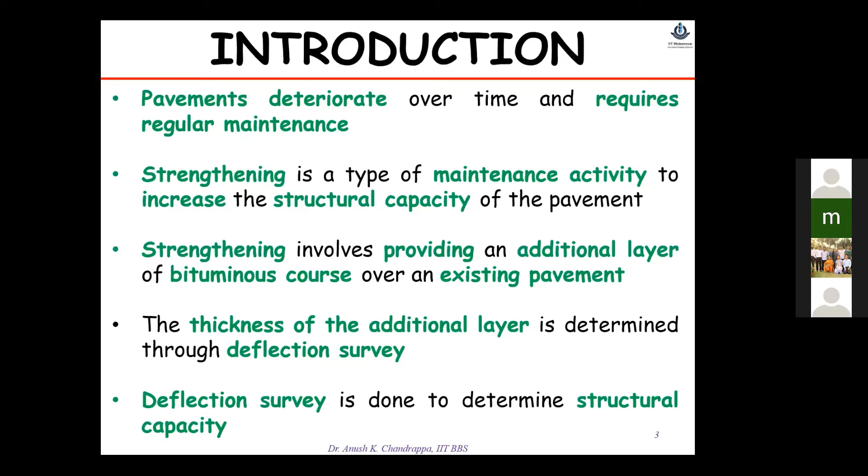Basically, pavements predominantly fail by three modes. One is rutting. Rutting is a typical failure where you see longitudinal grooves, wheel path rutting, and this is not a one-time phenomenon — strains accumulate over time. After several years of traffic, this shows up as longitudinal depression. This depression can be due to the mix or due to the subgrade, but generally for pavement design purposes, we talk about subgrade rutting. This is normally called rutting, where there is a longitudinal groove kind of deformation which is non-recoverable.

It won't recover again once it is deformed. So this is addressed generally in the guidelines.

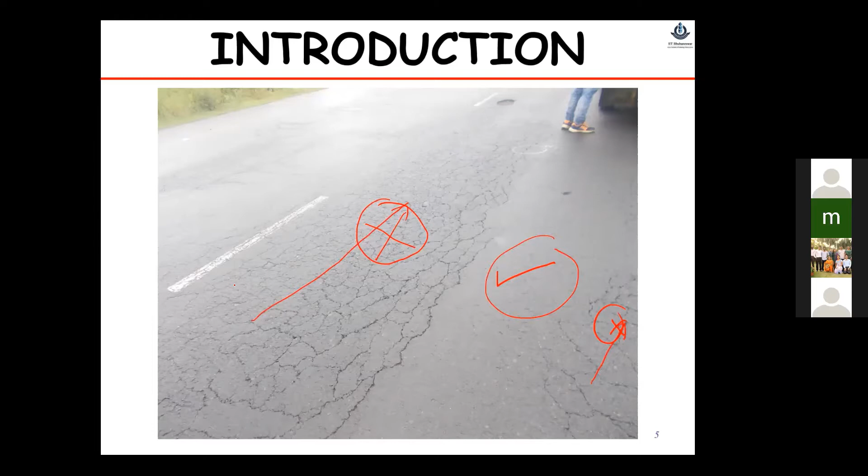The other category is fatigue cracking. You can see all these alligator cracks or fatigue cracks are generally seen on the wheel path. In this portion there is no crack, but in this portion there is crack. This is where the wheels travel and this is where the wheels don't travel. So this particular portion is always stressed.

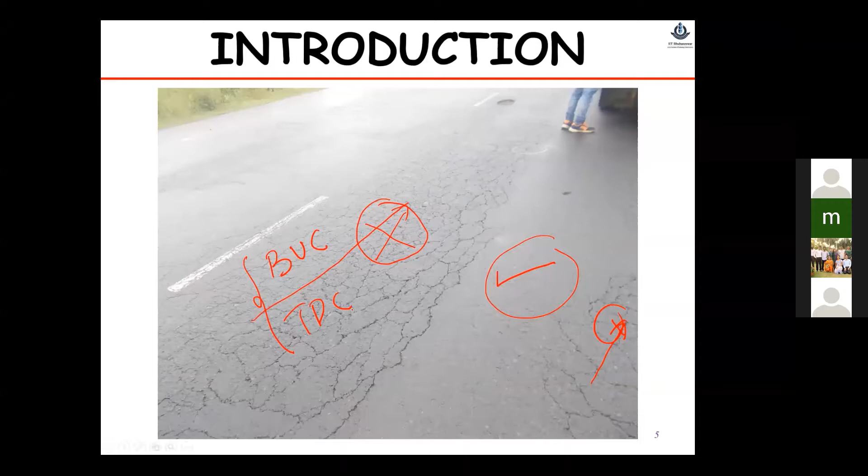Over time, due to development of tensile strains in the asphalt layer, cracks will generate. But we don't know whether this crack is bottom-up cracking, starting from the bottom, or top-down cracking. Unless we take a core, we won't be able to understand it. Depending on the crack type, the strengthening requirement or the FWD requirement will be different. So we need to first assess what kind of crack it is, whether bottom-up or top-down, and then decide the further course of action.

Next, we have again a typical fatigue kind of crack. You can see on the wheel path most of the fatigue cracks, and they're connected to form an alligator kind of thing, alligator skin.

Then we have damage due to moisture. Sometimes whenever there is a chance for moisture to enter into the pavement through cracks or from the bottom layers, this moisture will remain in the pavement structure. It won't go easily outside, so it stays within the structure. Over time, it will cause moisture damage.

This damage due to moisture is basically seen like big block cracks. You can see this whole stretch is kind of damaged, even though the wheel path is here and here, this stretch has still failed. So this is basically due to moisture.

When we generally take a core in these kind of stretches, you won't get a proper core. You will get a dismantled core indicating it is completely failed due to moisture. So this is how it looks basically when you take a core in stretches where damage due to moisture has occurred - the core disintegrates immediately.

And typically, this is how the aggregates look. You can see none of the aggregates have bitumen coating. That means over time, the water which is stagnant within the layer slowly removes the bitumen, as aggregates have more affinity towards water than bitumen. So over time there is stripping of bitumen, and when the bitumen strips, the strength of the layer decreases. Now, initially it was a bound layer with the bitumen, but now it acts like an unbound layer. So the modulus decreases, and the overall cracks will generate upwards.

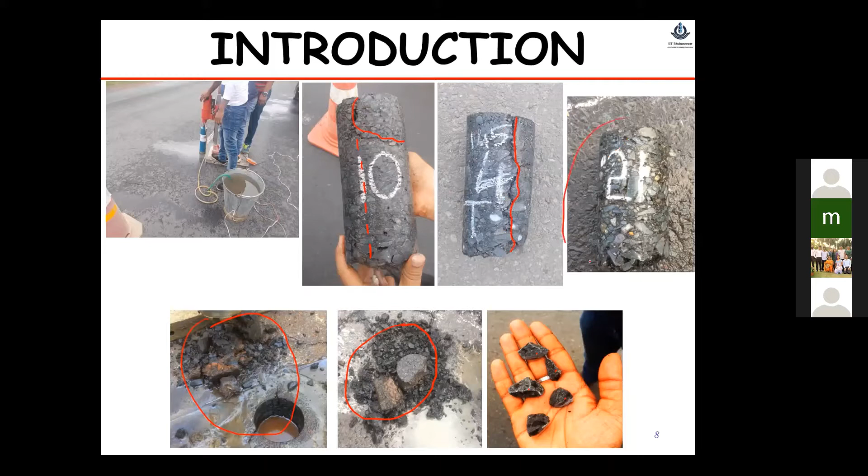And these are typical good condition cores, which have no cracks or distresses. So what I'm showing are the typical kinds of distresses you will encounter in a given stretch, because the given stretch may be 10 kilometers, 20 kilometers, or any length.

Now, before starting any structural evaluation, the first step is to understand the stretch. Whatever stretch we have obtained to evaluate, we first have to make some kind of destructive survey to understand what kind of distresses are there and to what extent they are spread. For example, this kind of moisture crack may be a local phenomenon, or it can spread over few kilometers or few meters. Similarly, fatigue cracks may be spread over few kilometers, and later there's no fatigue crack, and again there's a fatigue crack. So we need to first understand the stretch so that we can make decisions later on.

So the destructive survey is the first step before going to the non-destructive survey using FWD. Once you understand the stretch - what is the good stretch, bad stretch, poor stretch - then accordingly it will be required to make some test planning.

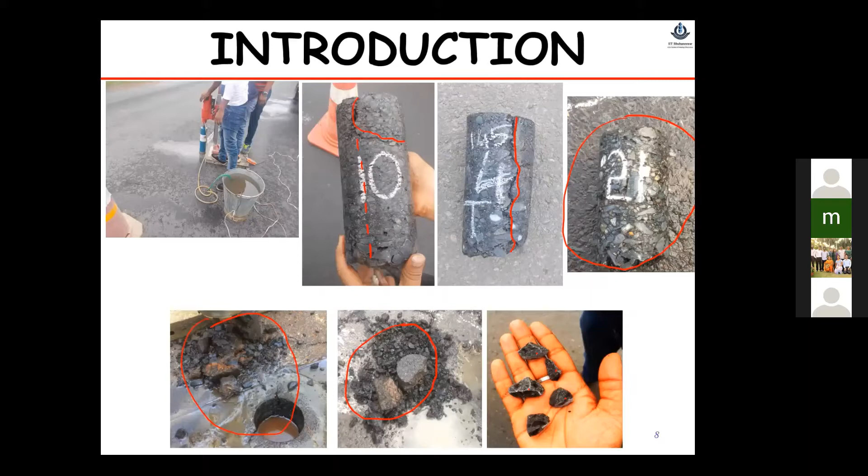So we'll come for that point. Depending on the stretch condition, we can assess what is the requirement for a particular stretch.

So yeah, it's a typical aggregate. You can see here there is no bitumen in any of the aggregates. This is actually water, not bitumen. You can see how this has been stripped completely. So this way, the damaging moisture will be affecting the mixed layer performance.

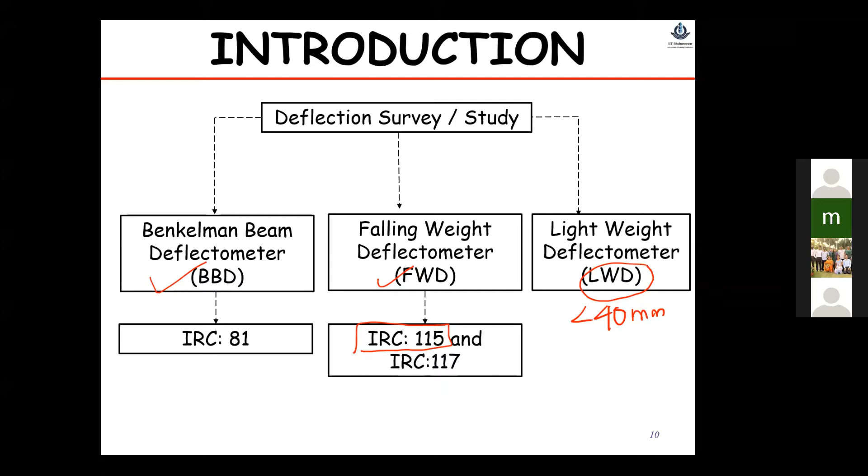So the FWD is being now used to conduct the structural evaluation of pavements. So moving on to FWD, the structural evaluation of pavements has been improved considerably. As I told you, initially we used to use BBD, Benkelman beam deflectometer.

So in BBD, it is quite laborious. We need to basically arrange a truck, load it to 80 kilonewton weight, and then we take 3 readings for 1 deflection point. So it takes a lot of time to do that. And if you get a very long stretch, it will take maybe several weeks to complete the exercise. So in that way, it was quite laborious.

And second thing, the load what we used to apply in BBD was static. The vehicle used to go and stop there. We should note the deflection, take the deflection readings, and then calculate the pavement strength requirements. So there is another drawback, because static load never occurs on the pavements, other than parking lots and those kind of stretches.

So in FWD, we basically apply an impulse load. Impulse load is basically a very short time load. It just applies for a short time and then it is taken back. So this impulse load simulates the contact period that each point experiences on the pavement. We can vary the contact period by changing few things in FWD, but generally it applies an impulse load where we can simulate the contact time based on which we can understand the pavement behavior.

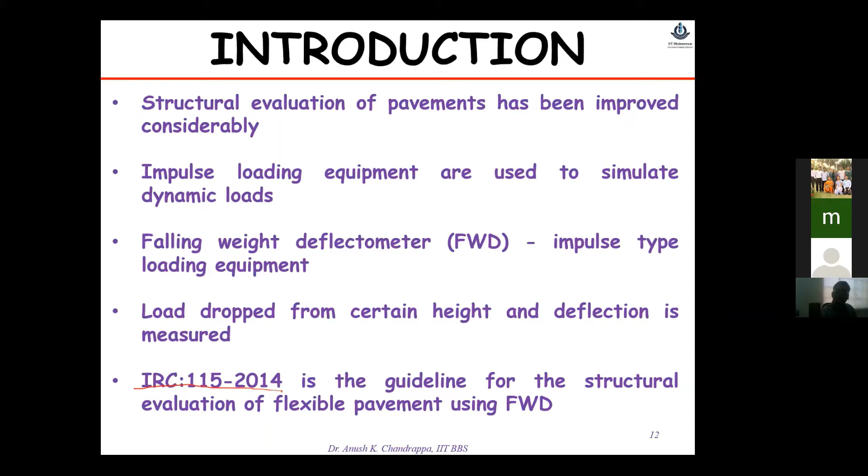And we drop a mass such that at this point we get a load of approximately 40 kilonewton. Standard load 40 kilonewton we get. So this load may be not exactly 40, it can be 41 or 38 like that. There are some corrections to be done later on.

If you go to very low stiffness, you get a high contact time. So the spring stiffness can be varied, and accordingly the contact time can also be varied. As per IRC, it is generally 20 to 30 milliseconds for one pulse duration.

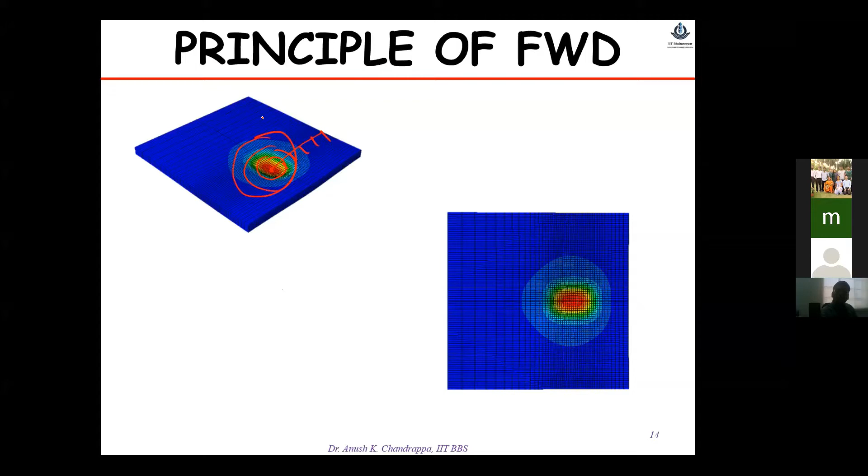Types of FWD. Generally, we have 2 types of FWD: one is in-vehicle FWD and the other is towing type. In the in-vehicle FWD, whatever portion you saw, all the hydraulic system to apply the load, and this frame carrying the geophones, all are encased in one cabin. This particular cabin will be encompassing all those components. So this way, the in-vehicle FWD is quite easy to take wherever we want, whichever stretch we want. It is very simple to carry, and it is easy to operate also.

The other kind is towing type FWD. In towing type FWD, basically we have a separate equipment or element which is to be towed by another vehicle. In this particular cabin, the loading system and the geophone frame are housed, and it is towed to the required distance. So in towing type FWD, it is quite difficult to transport. If you want to go to a difficult terrain, like a very mountainous terrain, you need to carry it on some truck, load it, unload it. It is quite difficult.

So that way, the in-vehicle FWD is quite easy, but there is a loading difference. In the in-vehicle FWD, we cannot carry heavy loads. That's why in towing type FWD, you can apply heavy loads, and most of the heavyweight deflectometers, HWDs, are always towing type. So there is a limitation in the load for in-vehicle FWD; we cannot apply very heavy loads, but with towing type you can go up to higher loads whenever you want to test very thick pavements or airfield pavements. That's a major difference, right?

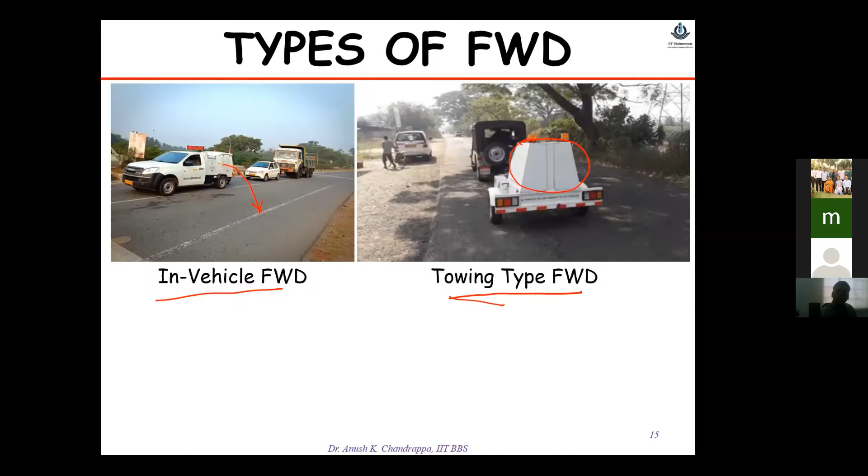Next, deflection measurement. Once you want to determine the pavement structural evaluation, before going to the field, the first thing we need to do is plan the test. Why? Because let's say we have a stretch of 50 kilometers, the first question is where to put the drop, where should I drop the load, and at what interval should I drop the load. If it is very bad, should I take a close interval? If it is very good, should I go with very far intervals? That's what we call a test plan. In the test plan, we need to decide at what intervals to take the data, and how many deflections to take, because if you're a consultant, we'll charge for each deflection point.

Let's say you are a consultant and you have FWD, someone asks you to get your FWD for testing. So we'll ask how many points you want. Depending on each point, you may charge the amount. So like that, test planning is very important here.

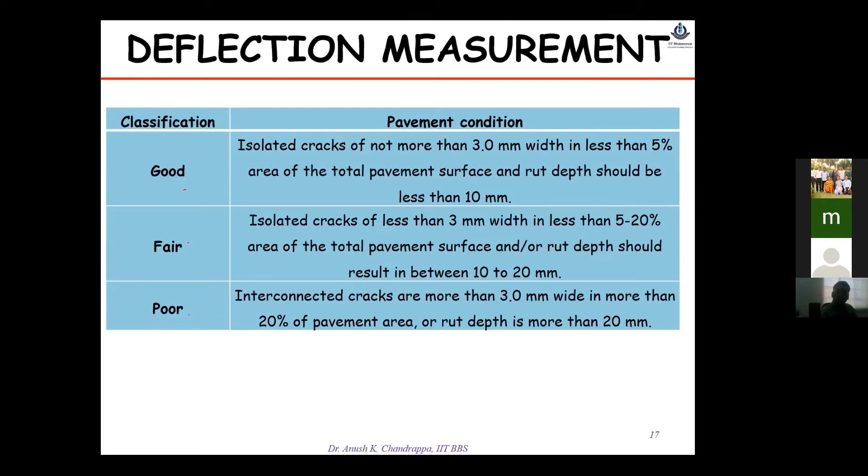To understand test planning, IRC 115 gives a sample number equation, and it defines three stretches: good condition, fair condition, and poor condition, depending on simple criteria. That's why you need to do a survey of the given stretch, take some course, understand the stretch, then decide what is good, fair, and poor. In 50 kilometers, several kilometers can be good, several fair, several poor.

Accordingly, you fix your coefficient of variation as per IRC 115, and then decide how many samples you want. For example, at 95% confidence level, N is 25 samples. So assuming a good section, you go with 15%. For 95% confidence level, error is 5%, so you put 5. We take the Z value as per normal distribution, nearly 1.65, and calculate to decide how many samples you want.

At 95% confidence level, with more confidence level, you take more points. At 90%, you got only four samples. So depending on your section condition and the confidence level you want, you can decide the number of samples.

Once we decide the number of deflections, next is the interval of measurement. If you want 25 samples per kilometer, it will be every 40 meters. At every 40 meters, you take one deflection reading.

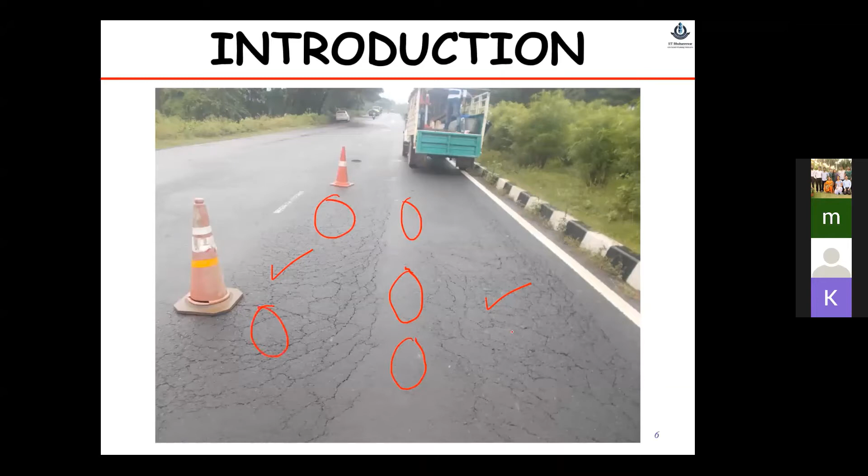So we'll go on the wheel paths, and there are certain guidelines given in the IRC. If it's a multi-lane highway, where to do it? Generally, if you see most highways, the right lane is where heavy vehicles travel. In this particular portion, heavy vehicles travel, that's why this inner lane is mostly damaged.

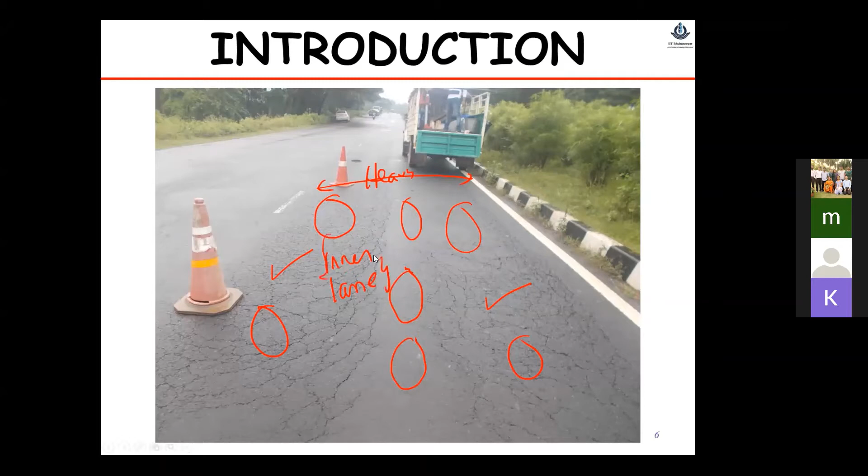What I have also observed most of the time is that the inner lane is mostly always damaged. Here also, it's the inner lane which is damaged, where the heavy vehicles mostly travel.

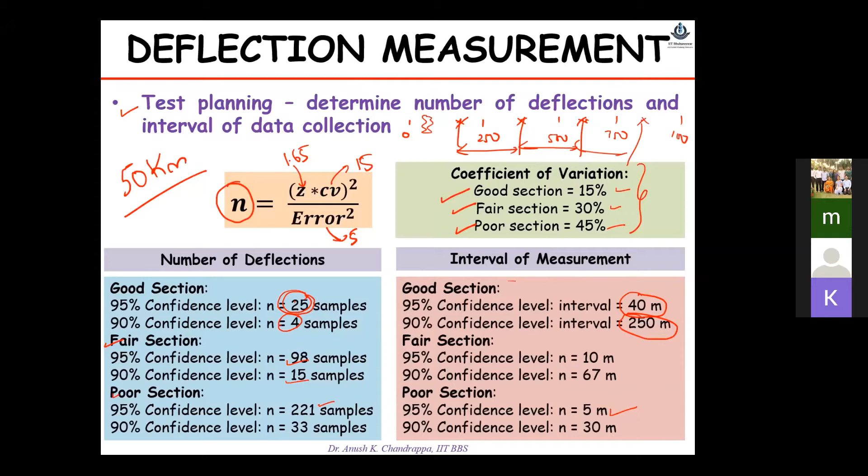So that way one can decide, as per IRC 115, what would be the appropriate lane to test on a multi-lane highway, and at what wheel path - it can be outer wheel path, inner wheel path, inner lane, or outer lane. We can do a deflection survey there, but ideally it should be on the wheel path, whether inner lane or outer lane.

So the FWD is positioned basically on the location where you want to measure deflection. The first thing is we lower the loading plate, and also the frame holding the sensors or geophones, which is a retractable frame. That frame is lowered until it just touches the ground or pavement. Then we raise the mass and drop it.

When we raise the mass and drop it, the first drop is generally called the test drop. Why a test drop? Because there can be some error in data acquisition - sometimes you may have to adjust the load. Let's say, for example, instead of 40 you got 48 - it's fine, but still you will look for 40. So you drop it and check the load readings.

Ideally the deflection should decrease from the point of load application - as you go from D0 to D1 or D8, D5 and so on, the deflection should decrease. But if there's some stone or particle near the geophones, or a geophone resting on a particle, it gives spikes or errors in the data. These observations are made during the test drop.

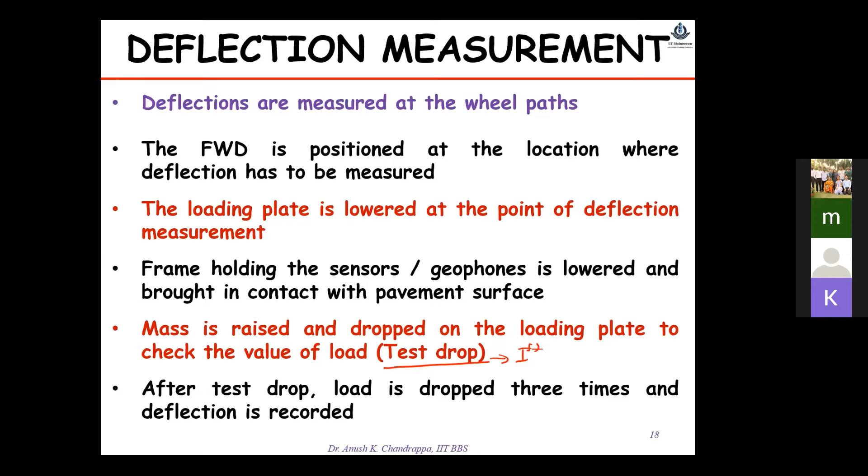That way we have data on temperature, deflection readings, and load readings. Then, every 500 meters in a staggered manner, we go with a test pit, which is required to determine the thickness of each existing layer. As I told you, we need this data to determine the modulus - the whole requirement of FWD is to find the modulus of existing layers in a non-destructive manner.

So at every 500 meters, staggered, we make one test pit on the shoulder side and determine the thickness of the asphalt layer, the base or sub-base, and the sub-grade - though sub-grade may not always be required. Basically we focus on the granular layers and bituminous layers. This way, every 500 meters we record this data.

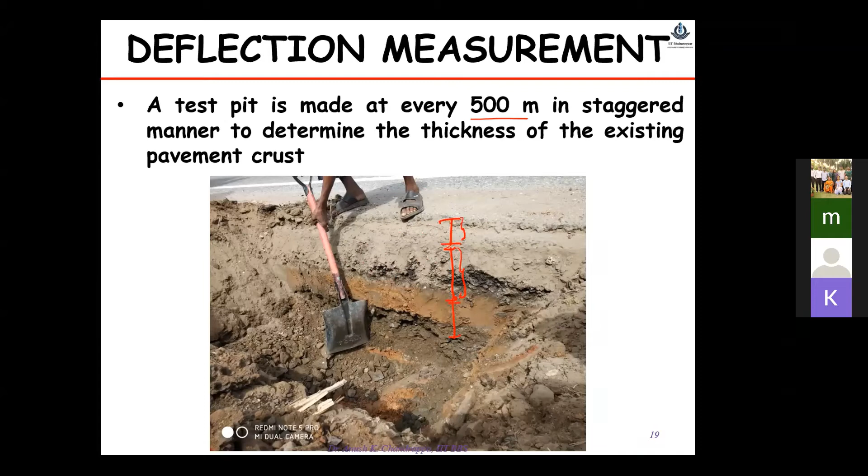So once we have all the data, let's say deflection data, temperature data, test pit data, and load data, now the data analysis comes. In FWD, the data analysis is one of the most difficult tasks we can say.

Why? Because we have deflections, and from deflections we need to back calculate the modulus values. But unfortunately, for one set of deflections, there can be n number of modulus values which can fit. For example, at one point you took 8 deflections, like D0, D1, D2, D3 till D8. You need to determine the modulus such that when you apply a load of 40 kilonewton, you get these deflections, almost similar deflections. But that modulus set can be n number of combinations.

So here, the judgment of the person making the data analysis plays a very important role. That is why normally we give a boundary of values which can be used to determine the modulus values, because if you don't give a boundary, it can give erroneous values. Even though the deflections are matching, the modulus values may not be practically correct. So some boundaries are recommended so that within that boundary we can play with it and determine the approximate modulus values.

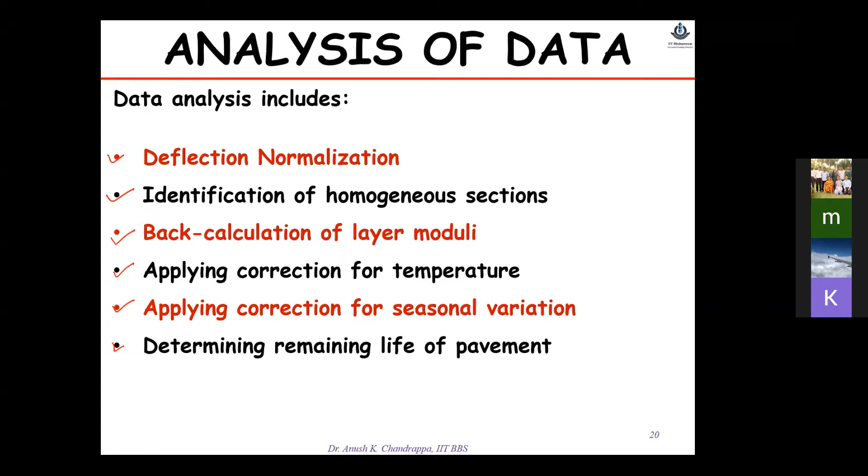The first step is deflection normalization. So what happens when you apply load? Let's say at this chainage we got these deflections, let's say D1. Sometimes people call D1 as D0 also.

It's left to the people how they will call it. Some people start with D0, then D1, then D2. Some may start with D1, D2, D3. So basically D1 or D0 represents the first deflection. Here in my case, I've taken D1 as the first deflection just below the load, the maximum one. So here D1, D2, D3 are taken.

See the load, 38 kilonewton is what we have applied. Nearly 40, again here we have 39. So in very few cases it is equal to 40. So we need to first bring it down to correspond to 40 kilonewton, or we need to normalize the data to the 40 kilonewton load application. So we assume it to be linear.

Why linear? This is one important thing here. We should not do testing, we should not determine deflections when the pavement temperature generally goes above 45 degrees, or preferably 40 degrees. As pavement temperature goes above 45 or 40 degrees, preferably we should not do FWD.

Because here we are assuming load linearity. That means, let's say at 38 load kilonewton, we got 0.33. So at 40, how much will you get? Simply it is 0.33 into 40 by 38. This is what we call load linearity.

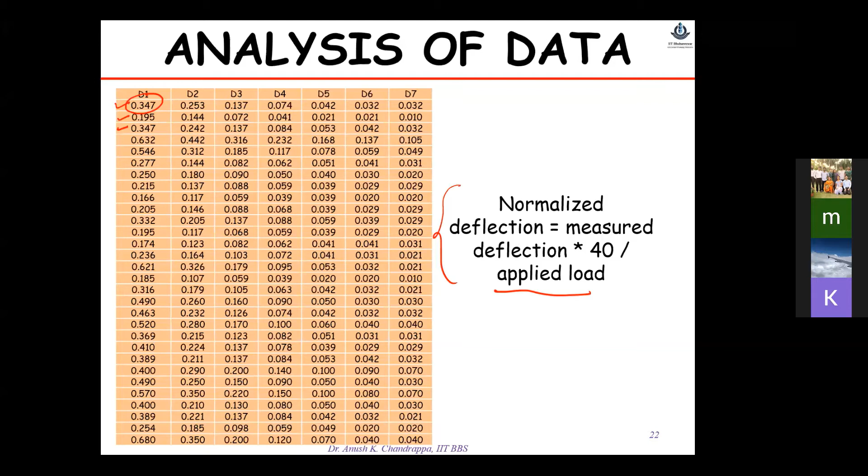Once you do the data normalization, the next step is to identify the homogeneous sections. So what is a homogeneous section? As I told you, you have already identified good, fair, and poor sections.

Let's say from 0 to 5 kilometer you have a good section, 5 to 10 kilometer a fair section, and say 10 to 30 kilometer a poor section. Within each section, what you decided was based on a visual kind of approach by seeing the pavement. But within the good section, some parts may be excellent, some may be good, some may be in the best condition.

So you need to classify that further to make the process more economical. Because if you assume the whole 15 or 50 kilometers to be poor, and decide the whole stretch needs a 100 mm overlay, certainly the whole 50 kilometers may not require 100 mm.

That makes the project more uneconomical. So homogeneous sections are a method to make the project more economical by identifying sections with peculiar characteristics that can be grouped together. The good, fair, and poor classification is for test planning, but homogeneous sections are for further data analysis requirements, making the project more economical and helping identify the requirements of each section.

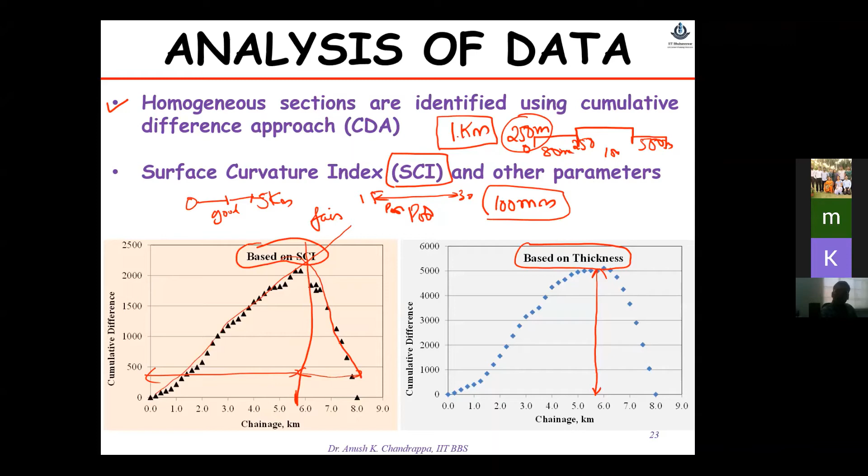So how do we do the CD approach? We'll see. Basically, this is the cumulative difference ZX. We're trying to take a cumulative difference between the actual response and the average response. This is a cumulative average response and this is a cumulative actual response. So this is some parameters like ZX, the cumulative difference.

XI is distance along the road section, the chainage. N is the nth pavement response, like first, second, third, fourth, and the total number of responses you've taken. RI is the response value. In our case, it can be SCI or it can be thickness, or any other relevant parameter. LP is the total length of the stretch that you have surveyed.

So now basically this is how we find the AI. You will just determine the average response values and find the AI. So we will determine this and determine the differences. This difference is basically plotted along the length, and you identify wherever the slope is changing. Wherever slope changes, those points are considered as the boundaries of one homogeneous section.

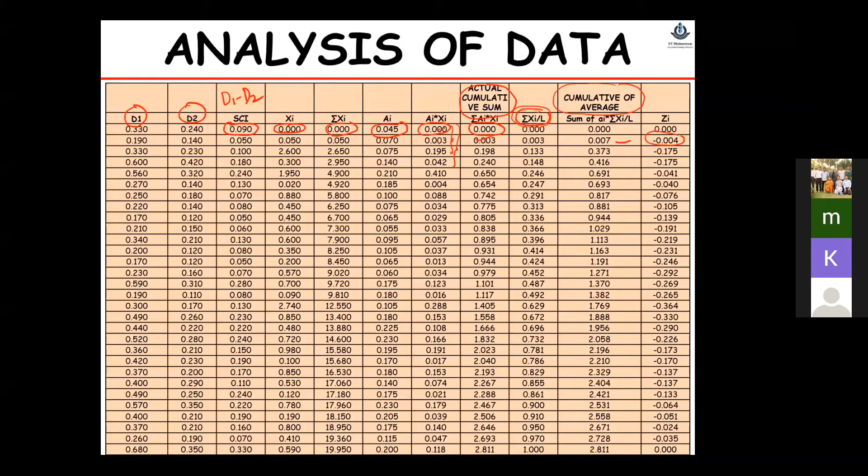Now here we will divide the length by the total length to get the average parameter and then determine the cumulative average response. We'll take the difference between this column and this particular thing to get the ZI value, or the cumulative difference. So once we get the cumulative difference, what we call ZX, we'll basically plot it.

So now what happens? When you identify the homogeneous sections, the next step is that we will group the data according to the homogeneous sections. Initially, we surveyed assuming it to be one stretch, or assuming good, fair, and poor sections. Now you have divided it into a number of homogeneous sections, each homogeneous section being like one stretch or one project, let's say.

So you will analyze each homogeneous section separately, because this homogeneous section is quite different from others, as it may need different kind of treatment, it may need different overlay thickness. HS3 may need a different overlay thickness, so like that, the requirements are different, so we'll be dealing with different kinds of analysis.

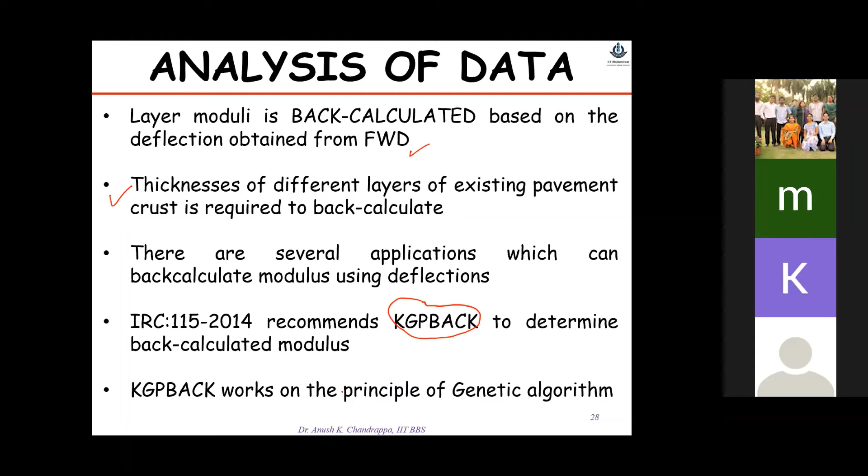IRC:115 recommends KGPBack - KGPBack as a software or program to back calculate the modulus values. KGPBack works on the principle of genetic algorithm. We'll see how KGPBack works. Basically, KGPBack has two things: one is genetic algorithm and an IITPAVE.

Here we will feed some values - we'll feed deflection values, we'll feed the load values, and we'll feed required pressure on these values. Then, within a given boundary of deflection of the modulus values, it will start searching which set of modulus values - like bituminous moduli, granular moduli, subgrade moduli - gives the best matching with the deflection you have measured in the field. Because here you need to basically match. Let's say you got D0 value in the field, then D0 predicted, and again D1 in the field, then D1 predicted.

So you need to minimize the error between the D0 predicted and D0 measured. This way KGPBack keeps iterating until you get the best match. Generally most guidelines like FHWA require approximately 2% error per sensor - that means 2% error is allowed in the prediction, like 14% total if there are 7 sensors, 14% total can be allowed. So we run this program iteratively until the error is minimized.

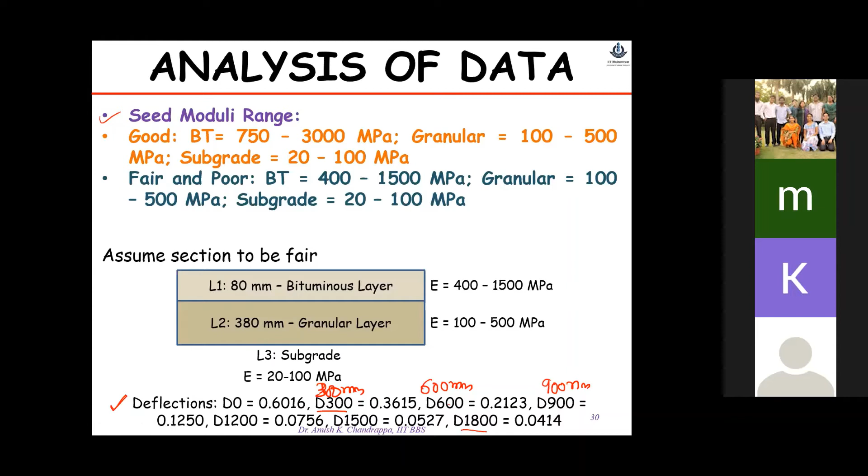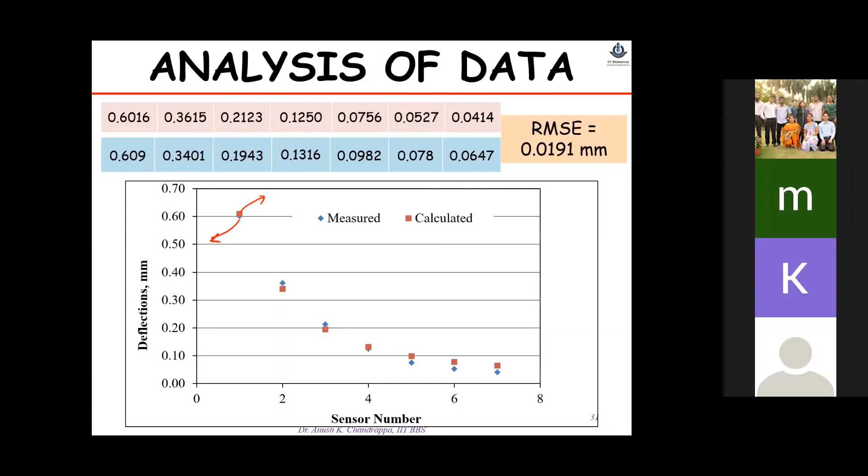So the KGP Back doesn't give you these values directly - we have to put the layer in IITPAVE and then do it. So that is one method. KGP Back doesn't directly give you the deflection calculated from the predicted modulus values.

So a typical KGP Back, maybe some of you have already seen this. I'll just show this - basically this is what the KGP Back home screen looks like. We need to basically put the standard values, like 40 kilonewton and 0.56. That's why we need to normalize data. If you don't normalize, your deflections won't correspond to 40 kilonewton. And the tire pressure is 0.56 because the plate radius is 150 mm - that's what you apply as the loading plate.

So then we will basically find the pressure corresponding to 40 kilonewton, we get 0.56 megapascal.

And certainly even the plate diameter has a very significant effect. Some FWDs have a 450 diameter plate, some have 600. So when you want to work with granular layers or granular materials, you will go with a bigger plate. Simply because if you go for a very smaller plate, the layer is compressed, which is actually not the correct way to measure the deflections. So when it is an unbound layer, you need to go with a bigger plate. If it's a bound layer, you can go with a smaller plate, like 30 centimeter diameter, generally what we adopt.

Once you give the values, you input the values, and you press enter, it asks you how many deflection points you have measured. Because there are different sensor configurations - some are having 4 sensors, some are having 9 sensors, some are having 7. So one can have different kinds of configurations.

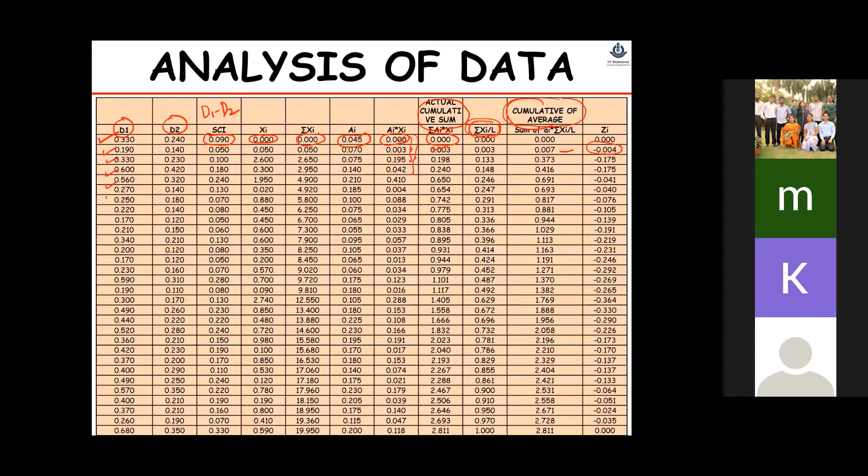Similarly, we go for this for every point, we do the same exercise, and we get a lot of modulus values. That means for each set of deflection, we get 3 modulus values. So for each homogeneous section, we'll be having several modulus values.

So once you do that, you will basically apply correction for temperature and moisture. Why? Because as we know, when measuring the FWD, temperature was not constant throughout. Somewhere it was 20, somewhere 30, somewhere 35, somewhere 38. So you need to bring it down to standard temperature. Now, 35 degrees is what we consider as the standard average temperature for Indian pavements. So we need to bring down all the modulus values to the value corresponding to 35 degrees.

So one thing you can observe here - we are not correcting deflections. In the BBD, we used to correct the deflections for temperature and moisture. But in FWD, we are correcting the deflection only for the load. The modulus, what we back-calculate, we are correcting for temperature. So that is quite more appropriate because the modulus is more dependent on temperature than the deflection.

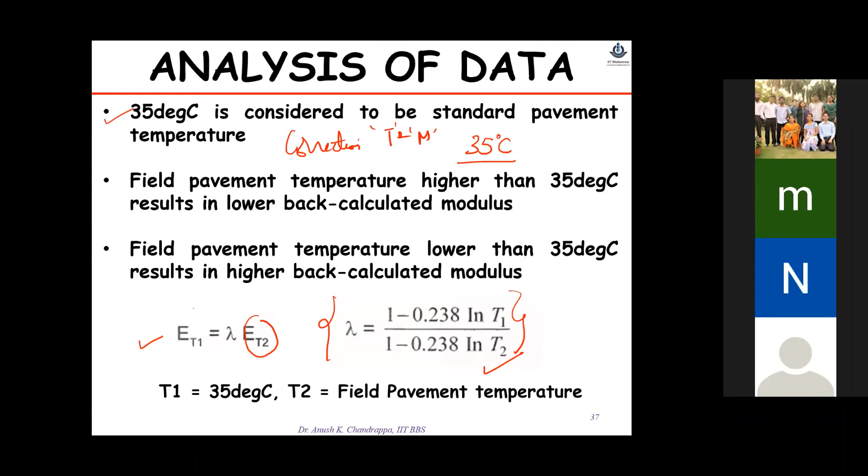So you'll apply the correction factors for the bituminous modulus for temperature. Then you will go for the correction for moisture. But the bituminous layer does not require correction for moisture. You will go for the subgrade layer and the granular layer because their modulus depends on moisture, so seasonal correction you apply.

Generally, when you do FWD, we note at what month the testing was done. Is it December, October, November, whatever month we do? Why? Because it is required here. So basically, whatever modulus you are calculating, you'll put E granular summer.

Again here, you'll predict what would be the equivalent modulus if it was monsoon. It's a predictive equation, a regression equation. It is bound to change depending on new data availability. So the E granular modulus and E subgrade for monsoon is predicted.

Similarly, if you do it in the winter season, December or January, you'll use this equation and determine the corresponding values for E granular for winter season.

So once you apply the correction factors, for one homogeneous section you still have multiple sets of modulus values. For each deflection point, you have one set for bituminous, one for granular, one for subgrade. So to find the requirement for one homogeneous section, you need to boil down all the modulus values to one particular value.

So basically what happens, as told you, for each homogeneous section, number of modulus values for each layer are back calculated because you have one deflection point like D0, D1, D2, D3, giving one set of modulus. Like this, there are so many modulus values for one homogeneous section.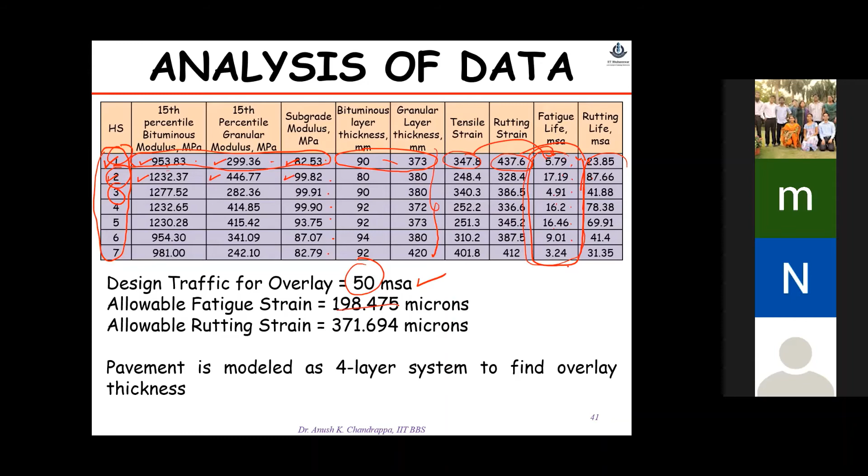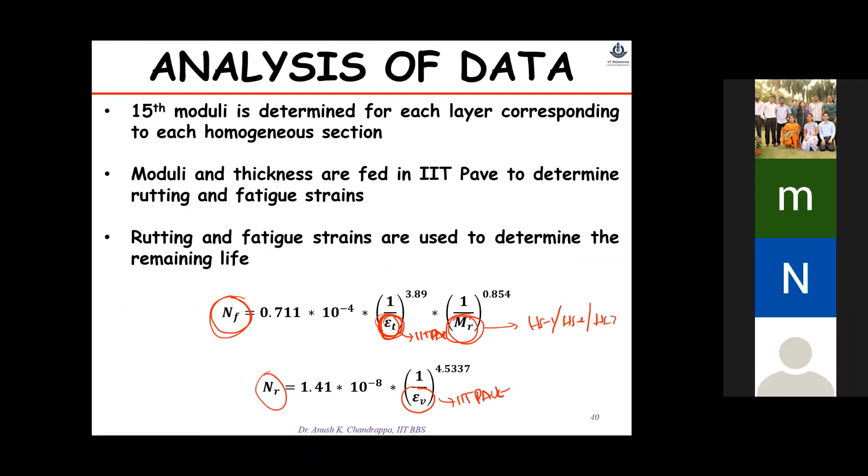For 50 MSA, this is the allowable fatigue strain and allowable rutting strain. You put the 50 MSA value here, determine epsilon T and MR. Now this MR, be careful, is not the value of the new layer, it is the value of the old layer only, because we assume the new overlay and existing bituminous layer are perfectly bonded.

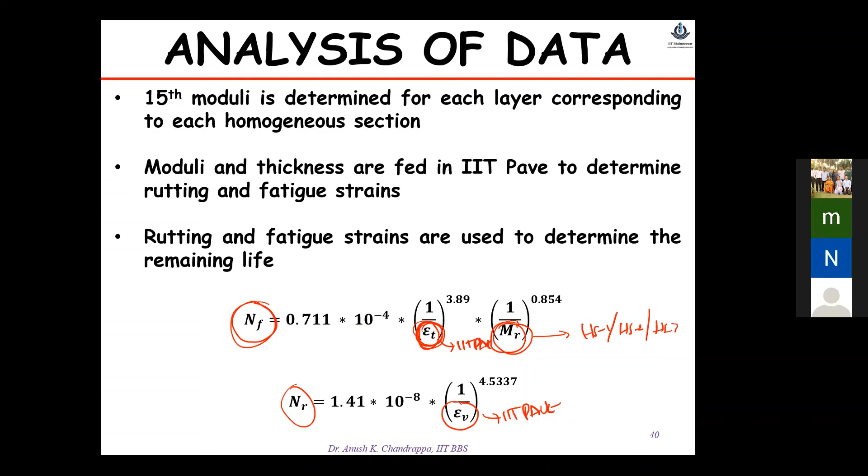Once you do this, you model the pavement in IIT Pave as a 4-layer system to find the overlay thickness. Here you can see the standard modulus IRC recommends, the Poisson ratio, the thickness assuming 90 mm. These are existing modulus values from the homogeneous section, with Poisson ratio from IRC and thickness from the FWD, as inputs.

I am measuring the tensile strain at the bottom of the existing bituminous layer, since this layer and the new overlay are completely bonded, so the new overlay does not take any tension. Tension is taken by the existing asphalt layer only. We determine the tensile strain at the bottom of the existing bituminous layer and get 193 and 277. Since critical is less than allowable, 198 is allowable and critical is 193.

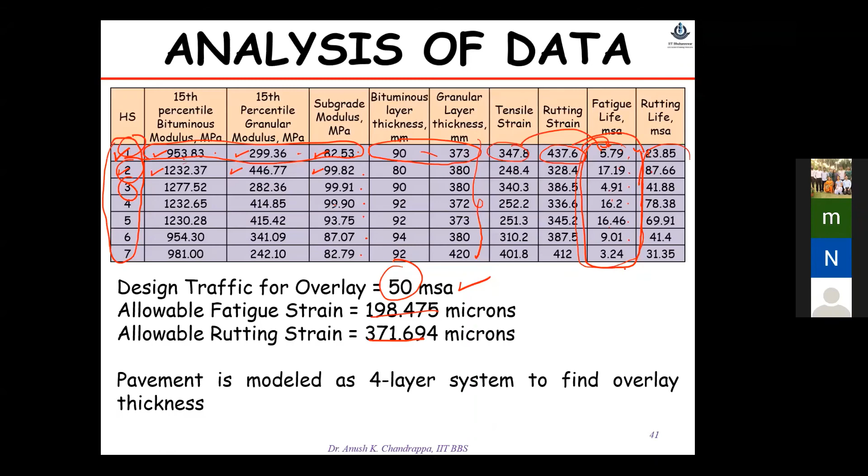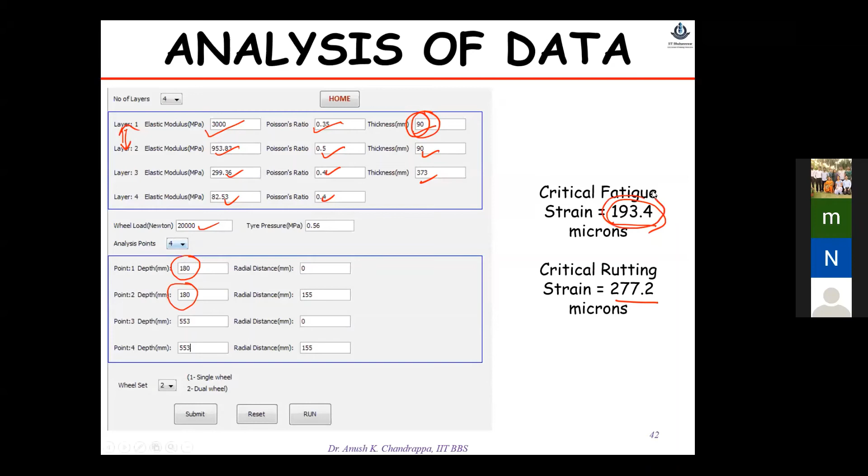So the assumed 90 mm is safe for this homogeneous section. But for homogeneous section HS2, it will be different. So for homogeneous section 1, we found that 90 is fine because it is coming safer. This way, the typical exercise is done to determine the overlay thickness.

Okay, so now let us take a 5 minute break. Then we will further study some equations and the effect of Poisson ratio on the back calculation of the values.

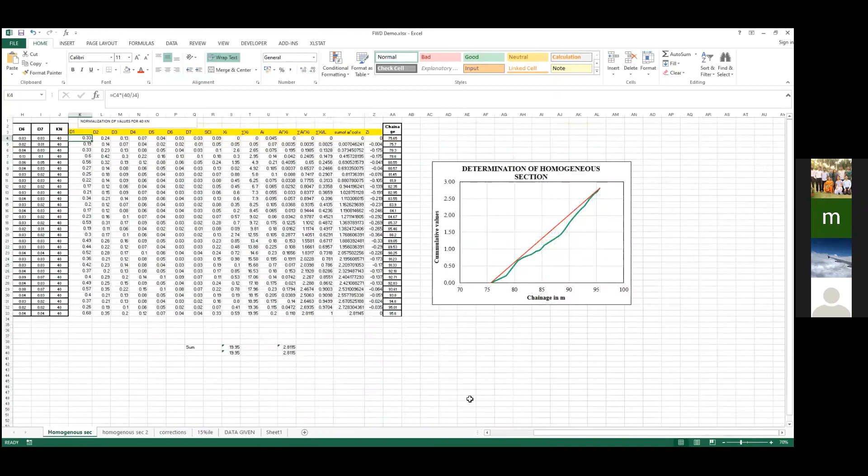Let us see this simple Excel sheet where I have made some calculations of FWD, what we discussed. So basically, let me just show you. This is the data we have got, the chainages and corresponding deflections, right? This is already normalized, let's assume it is normalized. Once we normalize, we have to find the homogeneous sections.

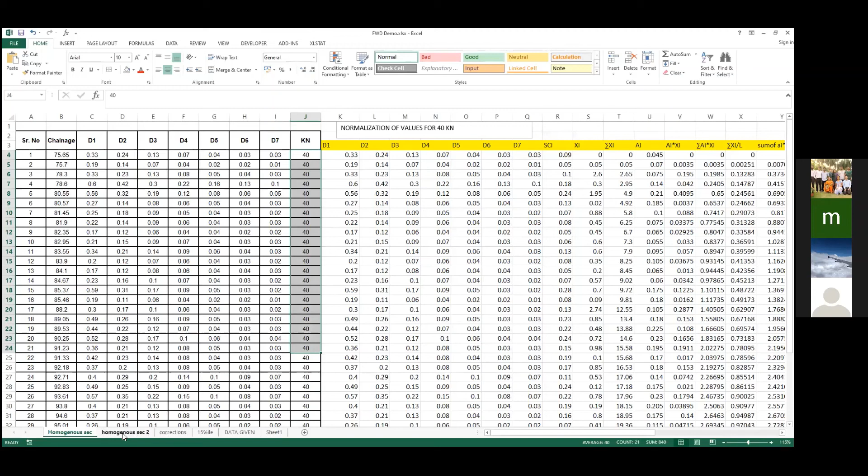Why homogeneous sections? This particular data corresponds to a 20-kilometer stretch. So this is a 20 kilometer road, and within this there can be many homogeneous sections, keeping in mind that 1 kilometer is the minimum length of a homogeneous section.

So we have determined the homogeneous sections using the CDA approach, as discussed in the slide, and we get this graph already shown. So we have got this homogeneous section. Now what we'll do, once we get this homogeneous section, is determine the modulus values corresponding to each homogeneous section. Let me show this here.

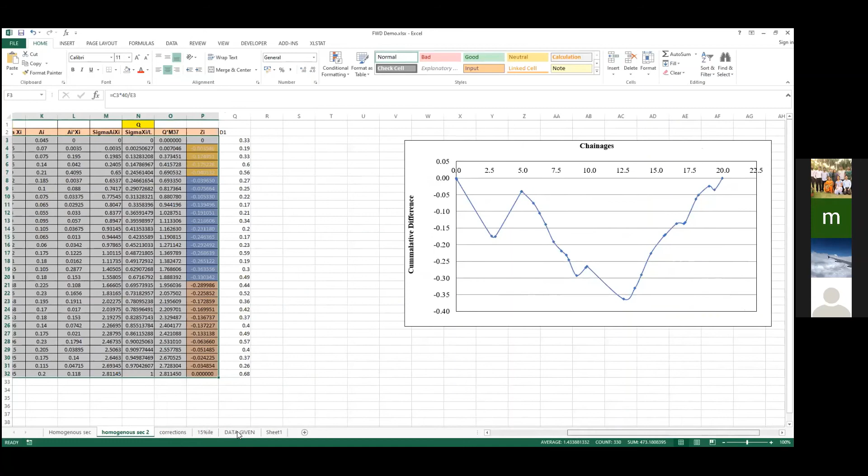Here, from this to this, I have one homogeneous section. From this to this, I have another homogeneous section. So once I do this, I determine the modulus values for bituminous layer, granular layer, and subgrade layer.

I have temperature values here. You can see 31 degree, 31.2, 33. None of them are like 35 degrees, so I need to basically correct them corresponding to 35 degrees.

You can see at 31.2 degree, I got 1479.6 from KGP Back, but corresponding to 35 degrees, it is reduced. It becomes 1256 because obviously at higher temperature, the bitumen modulus decreases. So we got this bitumen correction, as we have seen already.

Similarly, whatever modulus we measured, it is for a particular month. So corresponding to the monsoon season, it is reducing. You can see it's 489.1 what we got. Now applying the correction for the seasonal variation, we get 389.10.

Similarly for subgrade. So now once you determine this for one homogeneous section, you have approximately 19 sets of modulus values. Now to represent this homogeneous section with one value of bituminous modulus, we take the 15th percentile. We use this command to determine the particular value for the bituminous layer, for the granular layer, and for the subgrade layer.

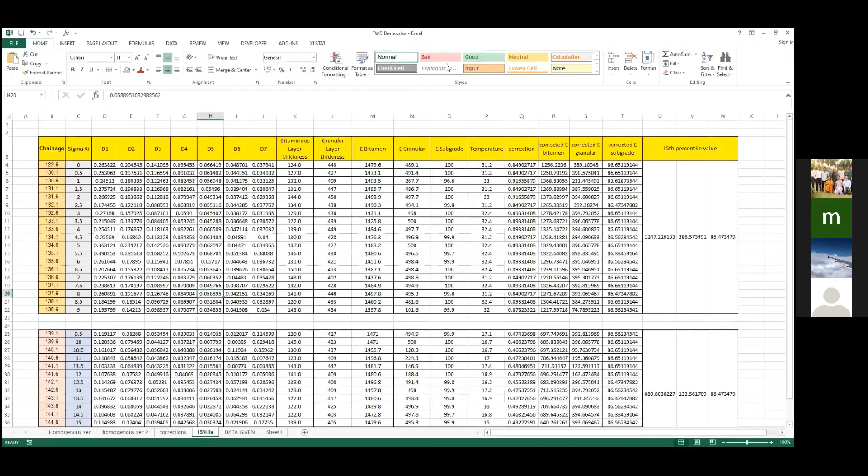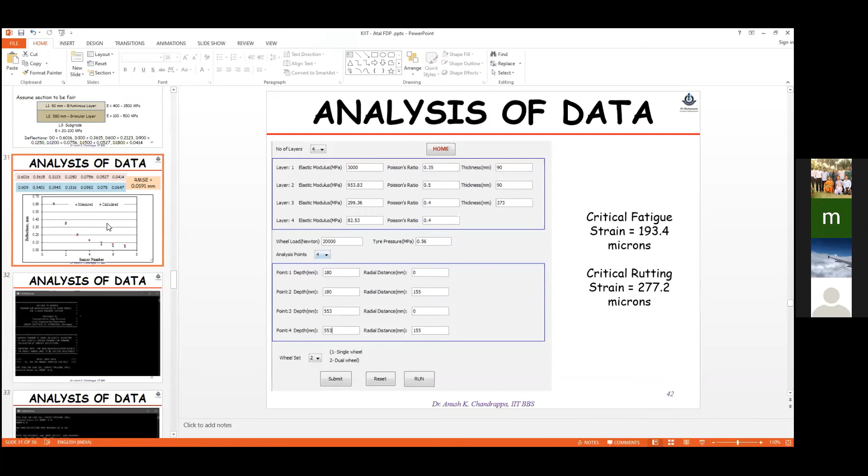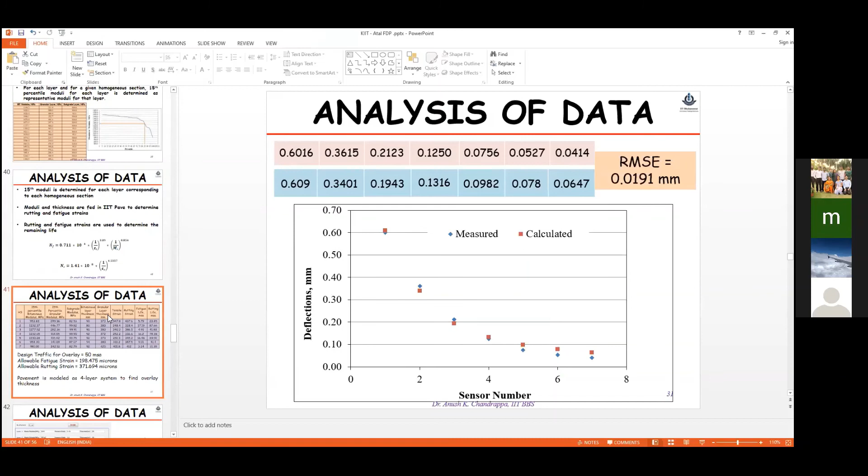I showed you this particular chart here. So KGP Back does not give you the deflections that are actually calculated once you've back-calculated your modulus values. So with those kinds of limitations, we also tried to develop one simple program at IIT Bhubaneswar.

We used the Boussinesq-Odemark transformation theory. Basically, in this theory, we use Boussinesq's equations, which are quite old equations, we can say. So using these equations, we came up with a MATLAB program which can analyze any number of data points within, let's say, 5 minutes. We get the data very fast. So basically these are the equations, I'll go into how this works later.

With this equation, you can determine the contribution of the bituminous layer, the granular layer, and the subgrade layer to the surface deflection. As I told you, in FWD we get the surface deflection, so the contribution of each layer can be determined using these equations.

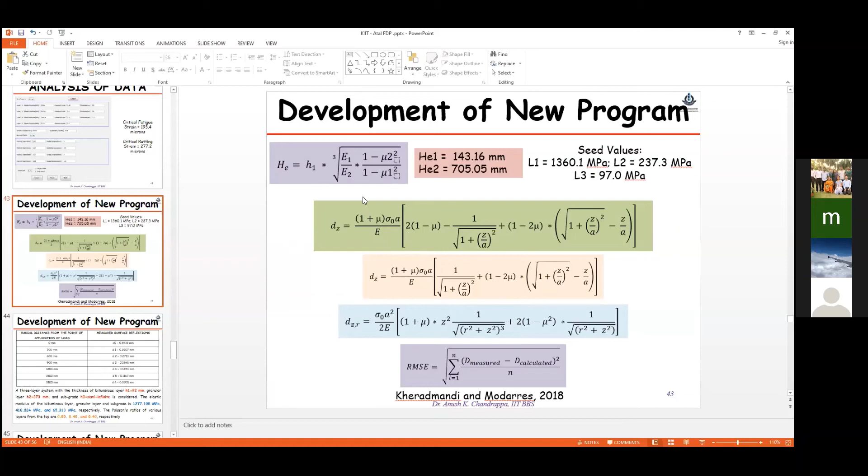So let's say this is the equation the Boussinesq theory gives. Now this tries to couple the Odemark principle with Boussinesq, so we call it the Boussinesq-Odemark transformation theory or program.

So let's take one simple example. This data we obtained from different radial distances, and we measured different deflections like 0.5519, 0.0907, 0.2713. We got all these values. Well and good, so it is a three-layer system.

Bituminous is 92 mm, granular 373 mm, and subgrade is infinite, obviously. So then the elastic modulus, what we have assumed, again this is assumed. Let's say we assume it will be 1277.105, 410.824, and 65. So we are making some assumptions. And Poisson ratio as per the IRC we have placed.

So then what happens is basically we'll first transform the layer or the system as per the Odemark principle. First transform the bituminous layer to granular layer, then granular layer to the subgrade layer. Like for example here, the bituminous layer...

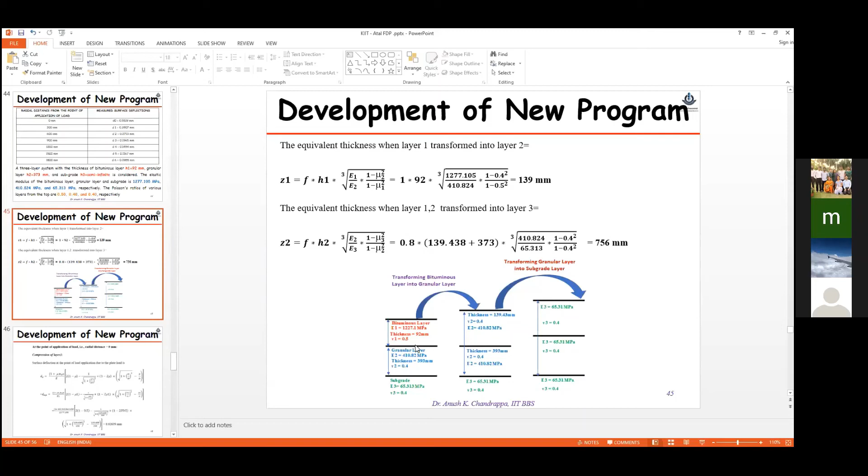Of this thickness of 92 mm and 1277.1 MPa modulus is equivalent to 139.43 of granular layer of 410 modulus. Like that, we have transformed each layer using the Odemark principle. I think you might have all seen the Odemark principle in your pavement design classes.

So again, this granular layer is transformed to the subgrade layer, making it a one layer system. Then, once we do a transformation, we can determine the compression in each layer. So what is compression basically? This 0.5519, what you got, is due to compression of the bituminous layer, compression of the subgrade layer, and compression of the granular layer. So these three have compressed to some extent to generate a deflection of 0.5519.

So that value we can calculate with this equation. Like dz, we have taken d(0,0) here at the surface, at distance 0, just below the point of load application. So give all the corresponding inputs. I won't go into more detail in the equation, it is quite complex, I understand.

So I'll just show whatever values you assume, like 1 plus 0.5, modulus value, Poisson ratio of the bituminous layer, pressure, the diameter of the plate, plate radius, modulus value of the bituminous layer - all these are inputs. But here the thickness they are giving is the thickness of the equivalent granular layer. The reason being the bituminous layer is supported on a granular layer, so as per the Boussinesq theory, it should give the layer on which it is supported. That's why we convert it into the equivalent granular layer.

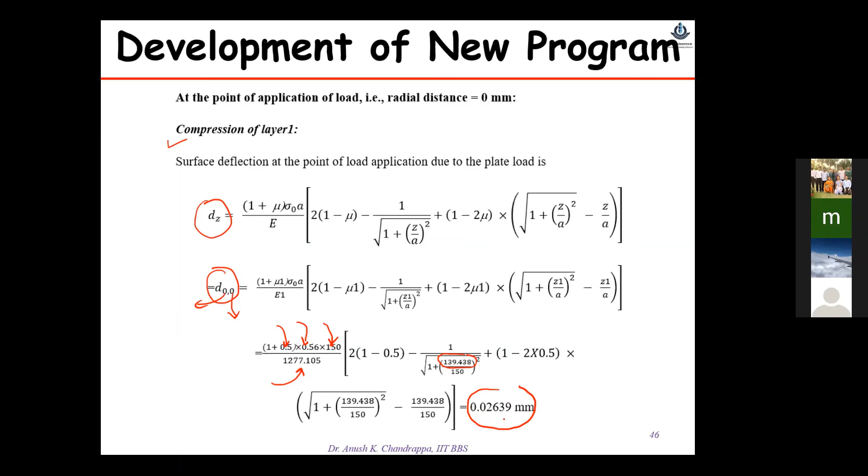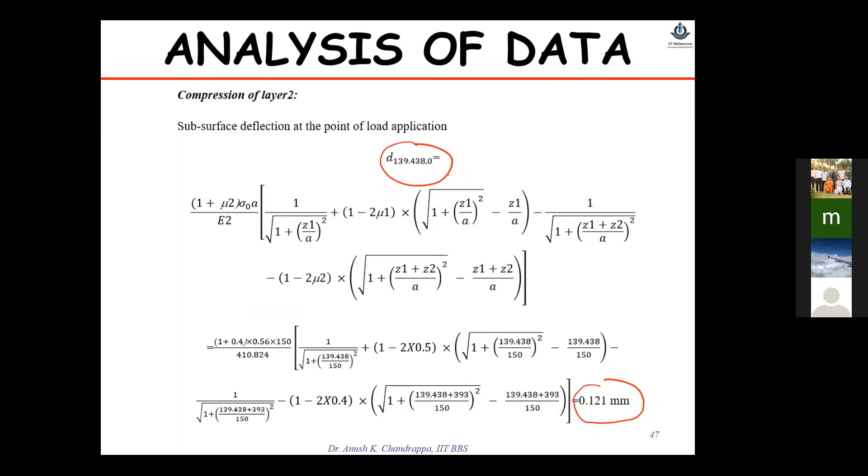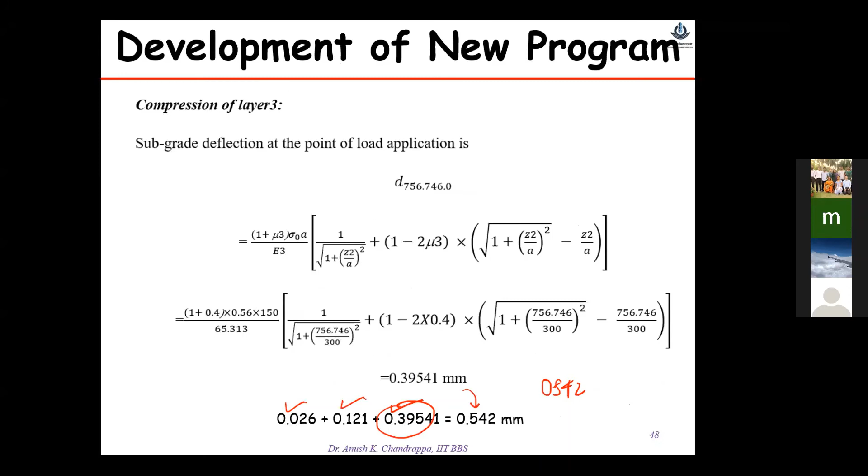Similarly, we calculated for other distances from the loading point, and we got this value. So you can see here, we got 0.5519, 0.5420, 0.2713, 0.2685. Obviously, we cannot exactly predict, and for a given modulus, these values may change when we change the modulus. So to get these values, we have continuously changed the modulus values iteratively and came up with the best value.

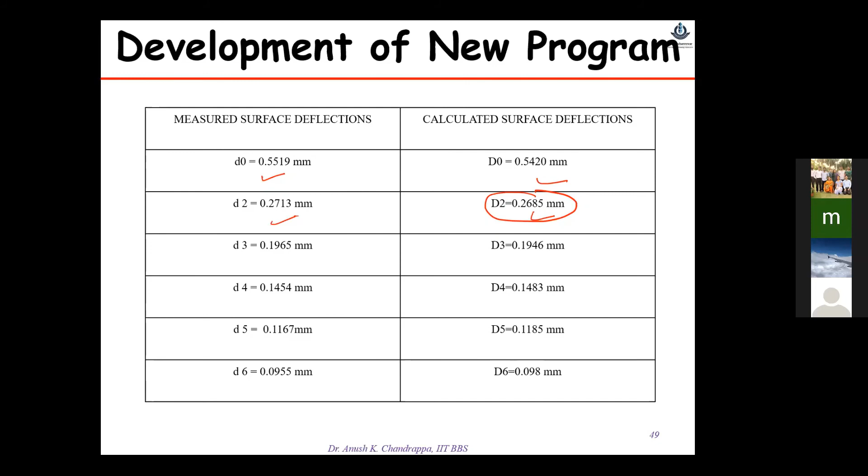And then we can further divide whatever you got. Let's say this 0.2685, you can further divide into contribution to the bituminous layer from the granular layer and subgrade layer, to understand which layer is contributing more, which is contributing less, and how things are changing, to better interpret the results. So we developed a Boussinesq-Odemark transformation theory in MATLAB, which couples the Boussinesq theory with the genetic algorithm function. With this program, we have found that it gives less RMSE error compared to KGPBACK, and the modulus we are predicting gives a better relation with deflection bowl parameters.

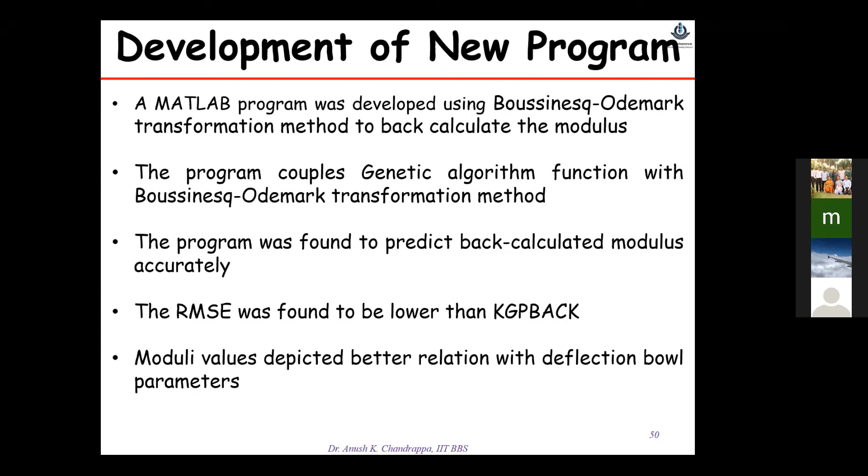So why are we relating with deflection bowl parameters? Because deflection bowl parameters are something from the raw data - without applying any corrections, without introducing any other factors, you are determining deflection bowl parameters. Typically, we use surface curvature index, D0 minus D300, middle layer index, and lower layer index. These are the typical deflection bowl parameters we use, and these are raw data - you don't do any correction, you don't apply any equation.

They're measured. So then for a given particular stretch, we try to check the program - this is from KGPBACK, this is from the MATLAB program as per Boussinesq-Odemark theory. We can see the RMSE is consistently low compared to what KGPBACK is giving. The second thing, in this program, we can put batch data - we can just load the Excel file, and we get the output as an Excel file with all the modulus values and all the related requirements.

So that way we can solve the section within 5 minutes, so no need to input all the data. Second, we see the relation. We try to correlate what the KGPBACK had given and what the Boussinesq theory had given.

You can see with the bituminous layer modulus relating to SCI, surface curvature index, D0 minus D300, we get a very good correlation of 0.30 compared to 0.03 from the KGPBACK. Generally, KGPBACK gives higher values always. Like if you give 1500, modulus lies somewhere between 1498, 1497, like that.

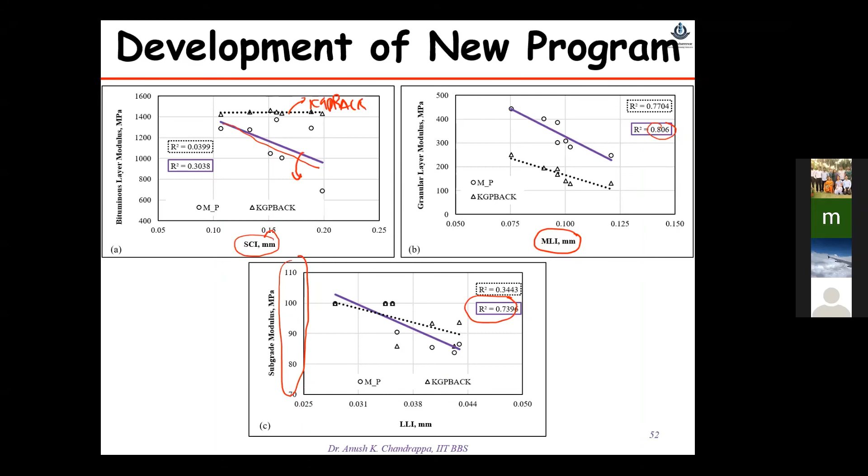So this way, this new program can basically improve the testing, improve the data analysis, and the accuracy can also be more. But it has to be further modified or calibrated, many things may be required. But at present, it is giving very low RMSE compared to KGPBACK.

Generally very less work has been done on understanding the effect of Poisson ratio because we think it's a very small parameter. We try to just assess what would happen. So we first determine assuming all layers to be 0.35, all layers to be 0.40, all layers to be 0.45. This scenario may or may not occur, but we're seeing what happens.

Assuming 0.35, we saw that the remaining fatigue life at concentration of 0.35 was higher. This is for 0.35 for all three layers: bituminous, granular, and subgrade. We can see here how the remaining life is changing. With increase in Poisson ratio, higher Poisson ratio gives lower fatigue life, lower Poisson ratio gives higher fatigue life.

Similarly, when we talk about the rutting life, it was completely reversed. Higher the Poisson ratio, higher the rutting life; lower the Poisson ratio, lower the rutting life.

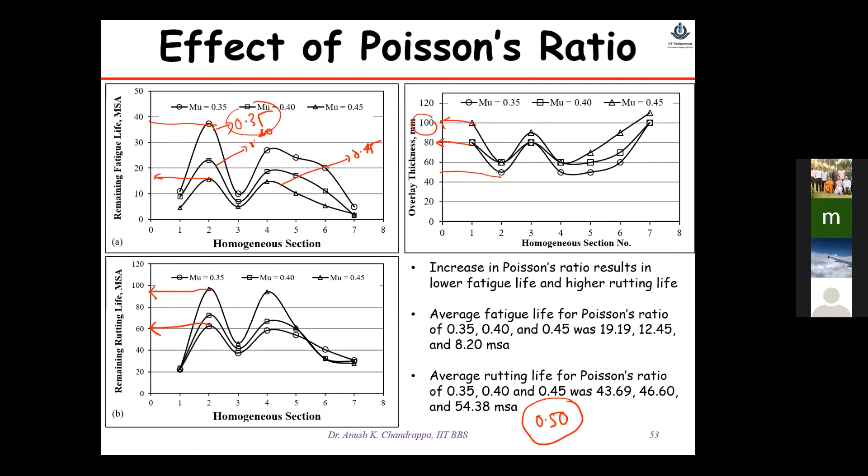We also tried to study the sensitivity of the layer Poisson ratio towards fatigue and rutting life, assuming general possible values like 0.35, 0.40, 0.45, which we generally adopt. What we found here is that for fatigue life, the granular Poisson ratio has a very big effect, not the bituminous Poisson ratio or the subgrade Poisson ratio.

The Poisson ratio of the granular layer has a very important effect, because the bituminous layer is supported on the granular layer. As the granular layer compresses or expands, whatever happens has an effect on the fatigue life of the bituminous layer. For example, if you see here, this is for 0.45 of granular Poisson ratio.

This layer is 0.45, and this particular sign is for 0.45, and this is for 0.40. Now we can see how much difference there is from 0.40 to 0.45 is almost around 32 approximately and 18. The huge difference is there.

So almost 14 msa difference change in the fatigue life just by changing Poisson ratio by 0.05. That means there is a significant effect of the Poisson ratio of the granular material on the fatigue life. That means assuming simply may lead to some overestimation or underestimation.

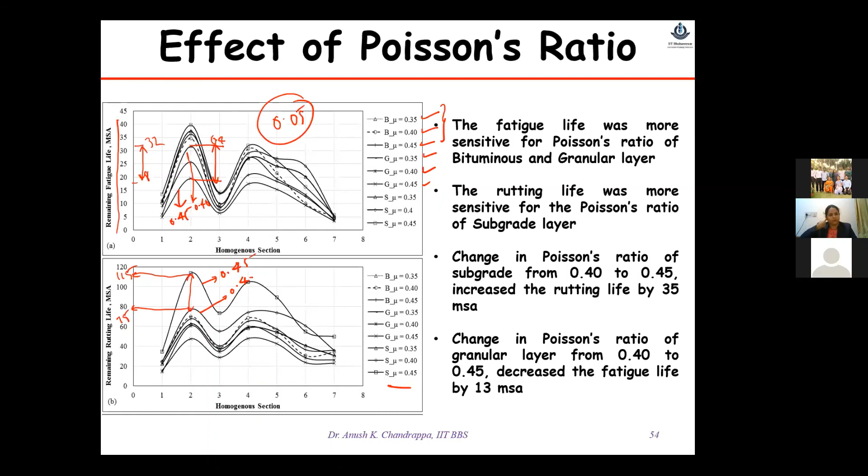So with this, I end my lecture here.

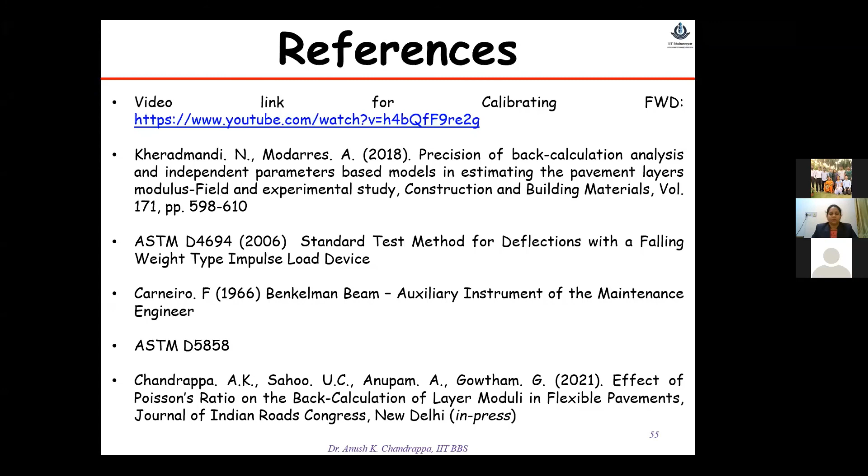Some references I've used to prepare this lecture, and the paper I discussed was recently accepted in the IRC journal, where we tried to study the effect of Poisson ratio, and also developed a program to back-calculate the layer moduli using Boussinesq-Odemark transformation theory. Thank you all for your patience.